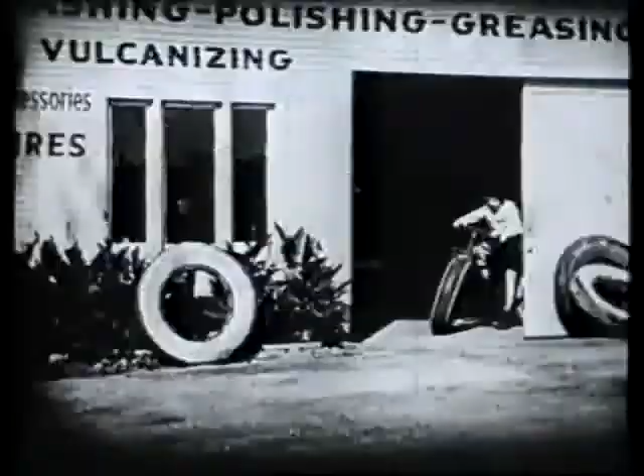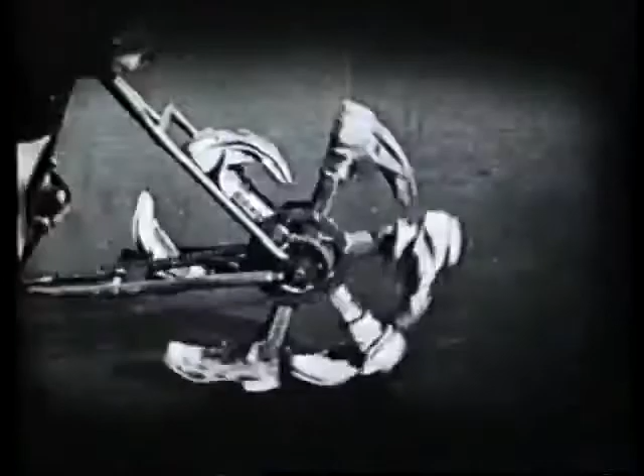In years gone by, cyclists who found their transport hard work would go to almost any length to make things easier. Some just wanted life to be a little softer. Others never did completely trust the wheel and would rather use their feet, or preferably somebody else's. And there were those who found the work so thirsty they couldn't bear to be far from the nearest beer.

But finally, in 1902, came an invention which helped every cyclist to surprising achievements. Sir Frank Bowden, cycling pioneer and owner of a small bicycle company in Raleigh Street, Nottingham, had realised that a variable gear would make cycling so much easier and far more popular. Approached by Henry Sturmey and James Archer, who had been working on 3-speed gears, he combined their two inventions and produced the world's first reliable 3-speed hub.

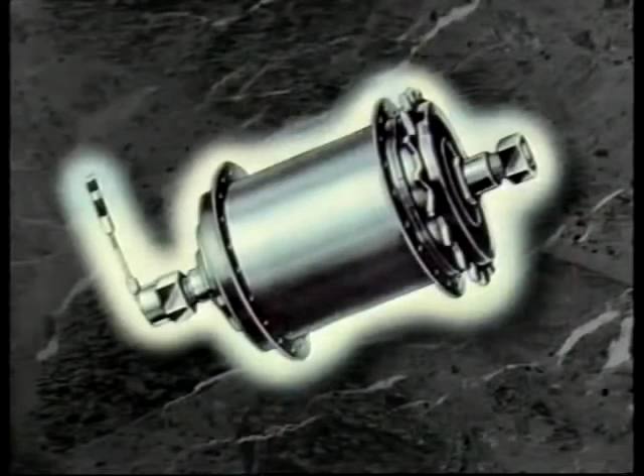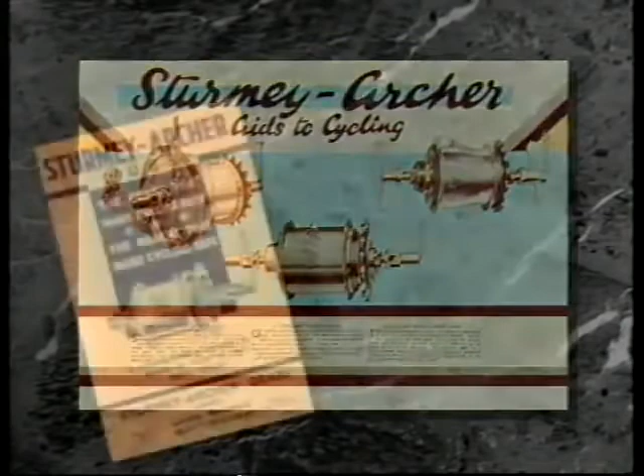It was an immediate success, and in the years that followed, the range increased and thousands of refinements were made. Sturmey-Archer hubs were fitted to millions of bicycles throughout the world as cyclists realized the benefits of enclosed gearing, protection from the elements, reliability, ease of operation, and low maintenance. Today's hubs are still setting new standards, produced to the highest levels of quality using the very latest computer-controlled technology.

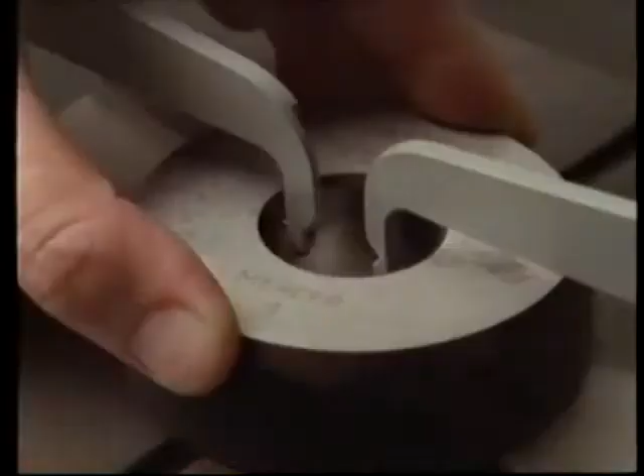Every Sturmey-Archer hub from the very first has been based on the same engineering principle. It was the invention of James Watt, the Scot who also developed the steam engine. And like all good ideas, it's both simple and elegant.

Imagine pushing a beam across a roller which rotates freely on a pin. The beam moves easily over the roller, and a point on its surface will move as far from left to right as a point on the surface of the roller moves around its circumference.

Now, if the roller were allowed to move across the floor as the beam were pushed, the point marked on the beam would travel further in a left to right direction than before, by as much as the roller moved in the same direction. As a first step in making this knowledge work for us, let us give the floor, the roller, and the beam teeth to prevent them slipping. If this simple machine is then made to operate in a circle, we have the basis for a usable system of gears.

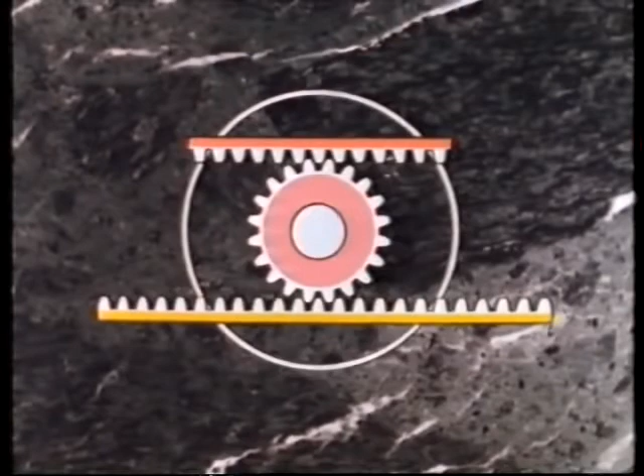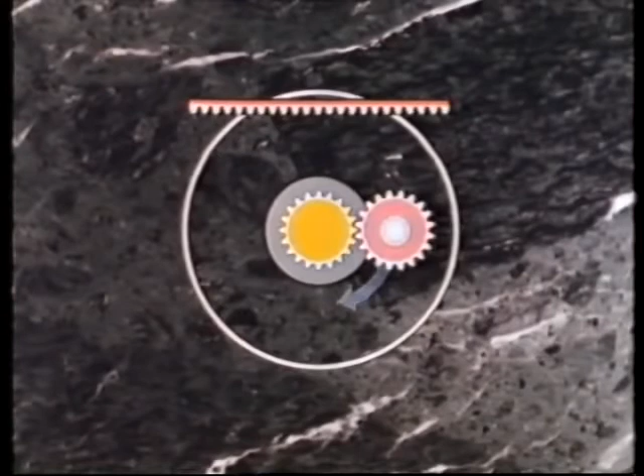We must start by naming the components of this system. The fixed floor has now become a fixed pinion, the sun pinion. Revolving round it, the roller becomes a planet pinion. It still has a pin through it which is fixed to and rotates with the planet cage. Finally, the beam becomes the gear ring.

If we apply power to the planet cage and move it through 90 degrees, the additional rotation of the planet pinion causes the gear ring to move further. In this instance, an extra 30 degrees, making a total of 120 degrees. Conversely, if the gear ring is rotated 120 degrees, the planet cage moves the planet pinion through 90 degrees. In other words, our simple system of gears gives the ratio 120 to 90, or 4 to 3.

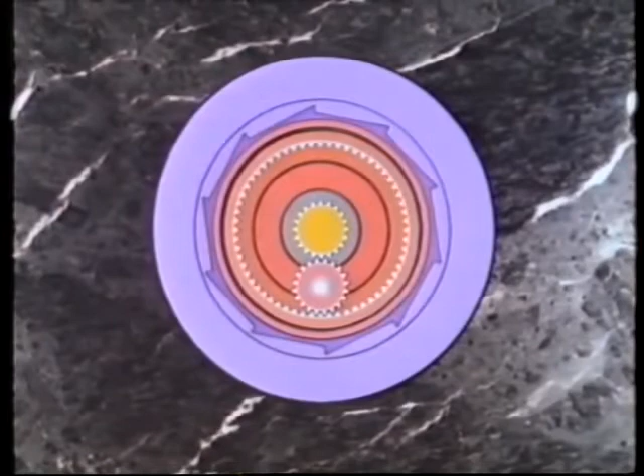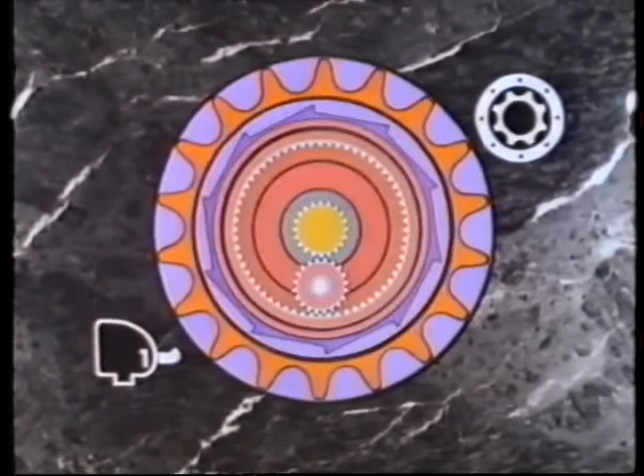The Sturmey-Archer system applies this basic principle in a bicycle hub. Power is introduced via a sprocket, revolved of course by the chain. If the sprocket could be made to turn the planet cage, and the gear ring were connected to the hub, we would have high gear selected, with the hub rotating 4 times for every 3 rotations of the sprocket. If the sprocket were connected to the gear ring and the planet cage turned the hub, we would have low gear, with the hub turning 3 times for every 4 rotations of the sprocket.

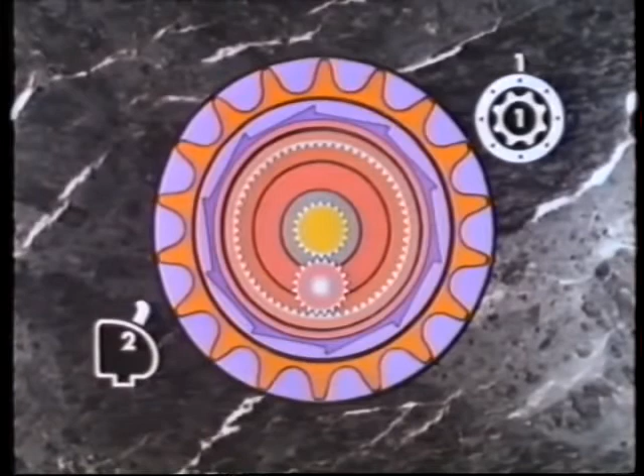And if the sprocket could be made to turn the hub directly without passing the power through both the planet cage and gear ring, we would have normal or second gear. This is the basis for the 3-speed bicycle hub.

In practice, more components are needed to make a hub work effectively. Firstly, there are additional planet pinions attached to the planet cage, and the drive from the sprocket is transmitted via a cross-shaped clutch. Connection from the gear ring to the hub is made via pawls fixed to the ring, which engage with ratchet teeth on the inside of the hub shell. Likewise, the planet cage can be linked to the hub shell via pawls fixed to its outer surface.

In high gear, the clutch is allowed to engage with the planet pinion pins, giving a direct link from sprocket to planet cage. As the planet cage turns, the planet pinions rotate, turning the gear ring faster. The gear ring pawls, engaged with the hub ratchet teeth, then drive the hub. The planet cage pawls are overrun because the hub is moving faster than the planet cage to which they're attached.

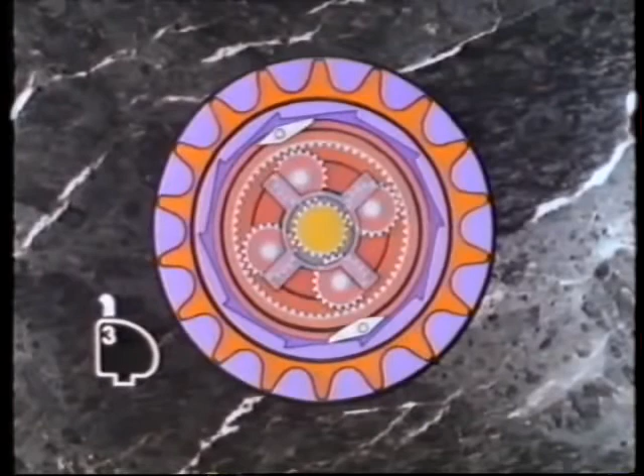In cutaway, the mechanism becomes clear. With the gear lever in position 3, the clutch spring is fully extended, pushing the clutch into the innermost position. The sprocket is attached to a driver which pushes against the clutch arms. They in turn engage with the planet pinion pins, which are set into the planet cage, and therefore make it turn.

As it does so, the planet pinions rotate about the sun pinion and cause the gear ring to rotate at a faster speed than the planet cage. The gear ring pawls attached to the gear ring then locate in the hub ratchet teeth, and the drive is thus transferred to the hub itself.

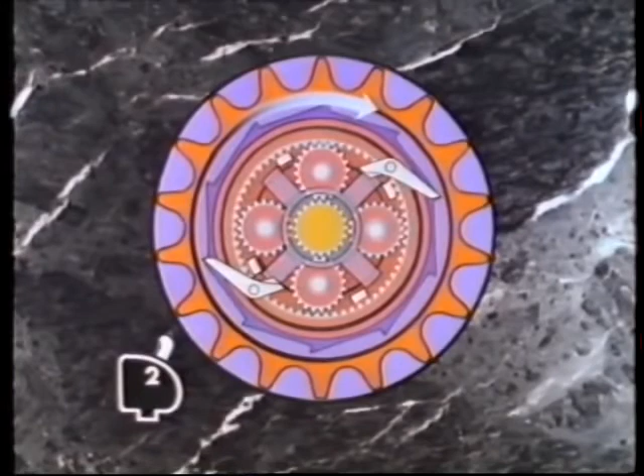By selecting position 2, normal gear or direct drive, the position of the clutch arms is altered to avoid the planet pinion pins when they rotate, but engage with the gear ring splines instead. This effectively transfers power directly from the sprocket via the gear ring pawls and hub shell ratchet teeth to the hub.

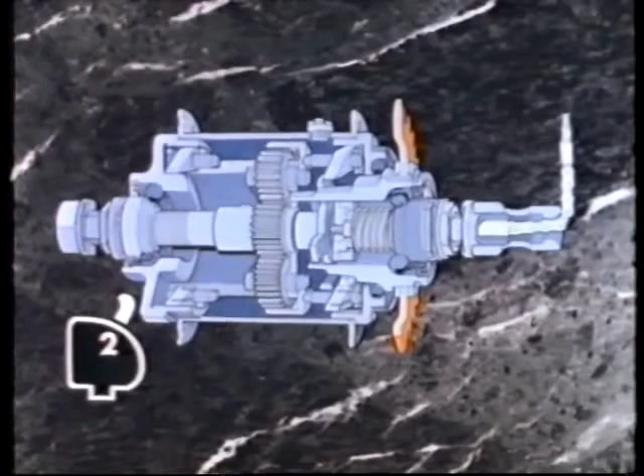In cutaway, the drivetrain is evident, from the sprocket through the driver to the clutch, which is seen here in its intermediate position, to the gear ring splines and thence through the gear ring pawls and the hub shell ratchet teeth to the hub itself.

So in this case, the hub will rotate at the same speed as the sprocket, and as in the previous example, the planet cage pawls are overrun by the hub ratchet teeth because the hub is turning faster than the planet cage. In low gear with gear position 1 selected, the clutch still engages with the gear ring splines.

This connects the sprocket to the gear ring, but the clutch is now positioned so that its arms also deflect the gear ring pawls and prevent them from engaging with the ratchet teeth on the hub. As the gear ring turns, the planet pinions turn the planet cage at a slower rate. With the gear ring pawls deflected, the planet cage pawls can engage with the hub shell ratchet teeth and drive the hub.

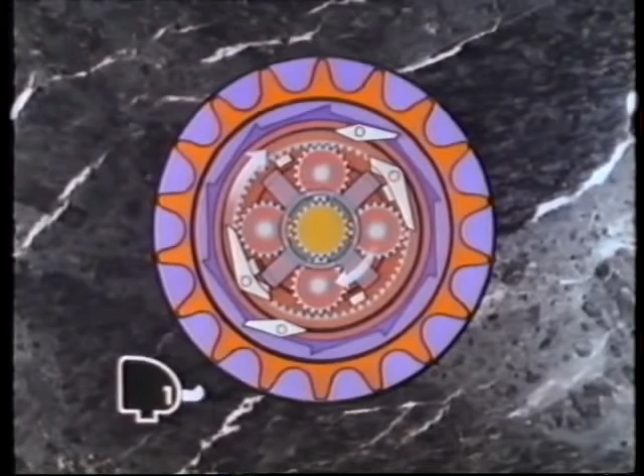In cutaway, the drivetrain can be seen passing from the sprocket through the driver to the clutch, which is in its outermost position. The clutch arms both deflect the gear ring pawls and engage with the gear ring splines to transfer the drive to the ring itself. From there, the planet pinions turn the planet cage and allow the planet cage pawls to engage the hub ratchet teeth.

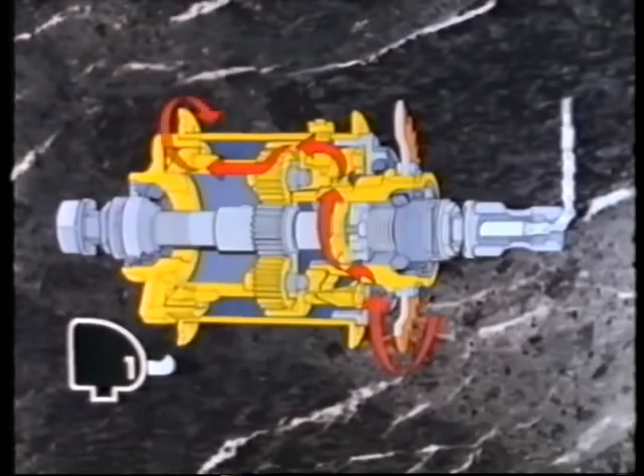More than 80 million Sturmey-Archer hubs based on the epicyclic gearing principle have now been fitted to bicycles all over the world. With an increase of more than 1 million hubs per year, every cycle engineer should know the necessary service techniques of hub disassembly, component checking and reassembly.